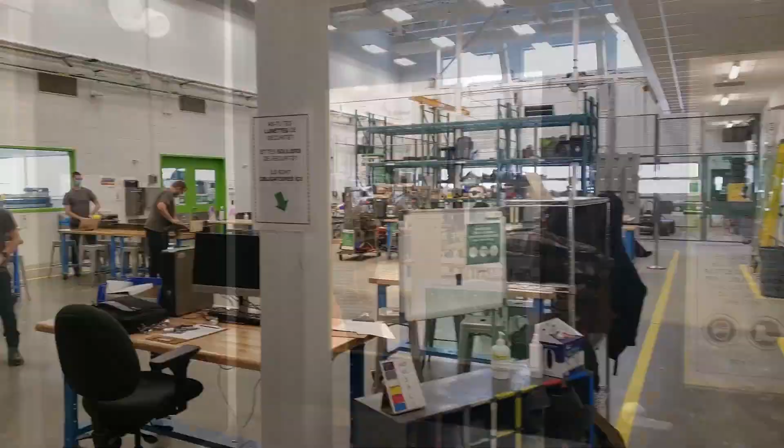So I recruited 7 engineering students from Sherbrooke University to build me a bot. Come on, let's go and see the team. Let's start with the team captain, Francis Roy. Francis is the project manager and works on the mechanical aspect of the propulsion system.

Next, we meet with Maxime Lavictoire. Maxime's responsibility is the development of the weapon's pneumatic components.

Here's François-Pierre Blondeau. He's the mad scientist behind the weapon. Is that a new weapon design? Yeah, but that's a secret.

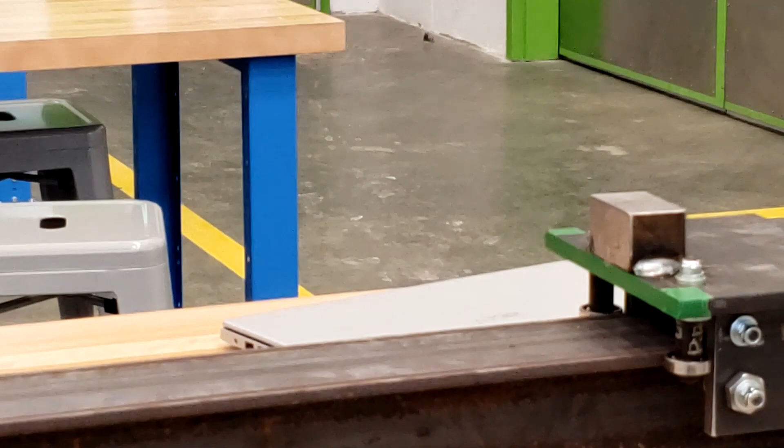Now we join Simon Boulet. Simon also works on the weapon's pneumatic components.

Next we meet up with Louis-Philippe Laliberté. He's in charge of machining and mechanical design.

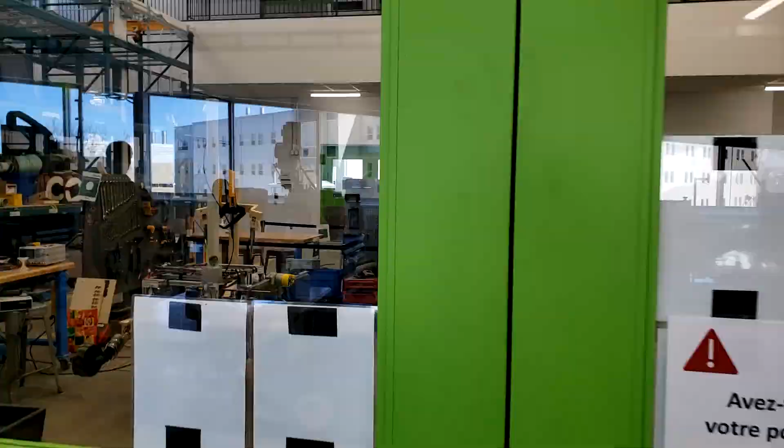Now we find Olivier Julien. Olivier is our electronics whiz kid and handles all the advanced system programming.

Last but not least, meet Félix Charpentier. Félix is responsible for sponsoring the Facebook page and CAD design.

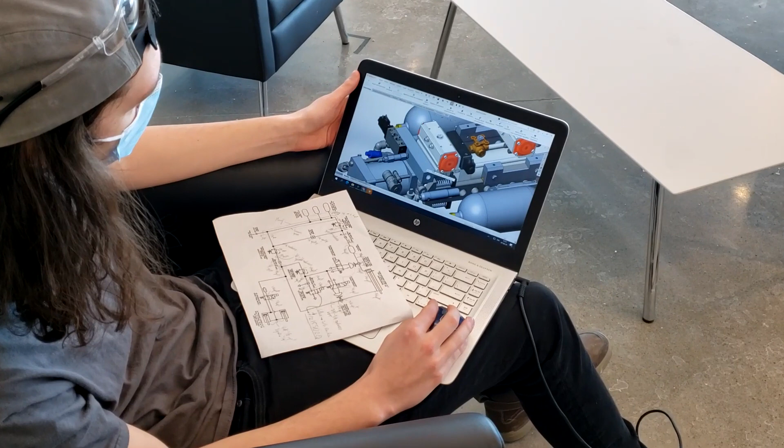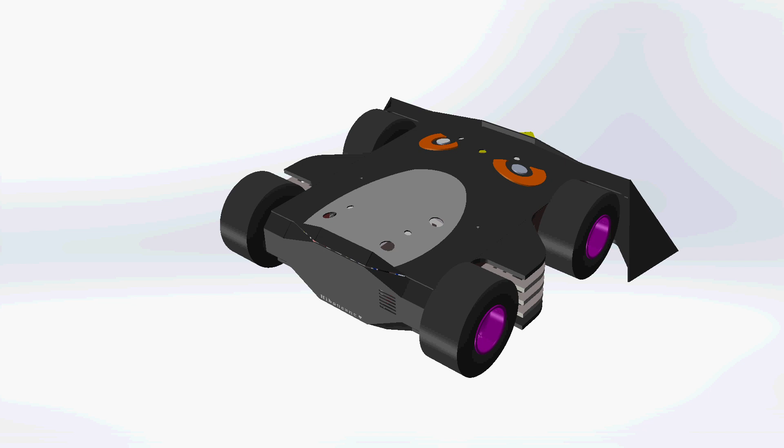Hi BattleBots, I'm Francis Roy, team captain and driver for Team XBot. Our goal is to bring to the show a robot who is fast, innovative, and fun to watch. Our team loves challenge and Nix represents this philosophy. We chose a design that goes off the beaten track but that can also survive a full match and put on a good show.

The fast and maneuverable side of Nix comes from my background as a motorsport driver. My driving style has always been described as aggressive but not out of control, so I want a robot that allows me to put my driving skill to good use.

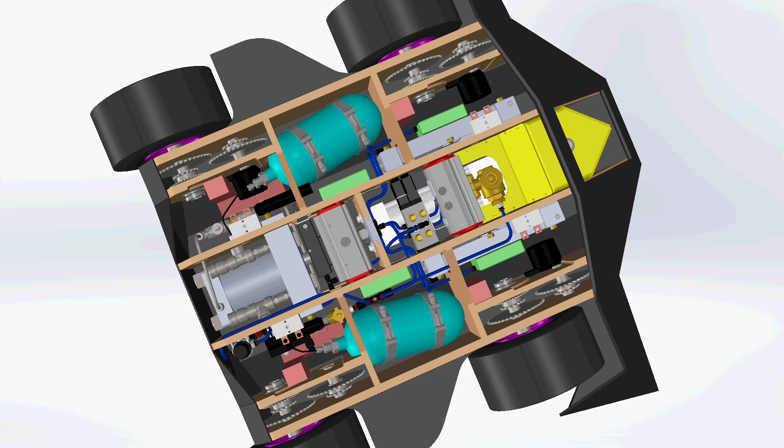Nix's main weapon will be a powerful puncher. The main advantage of this rarely used weapon is that, unlike a rotative weapon, we don't have to fight the gyroscopic effect of a spinning mass each time we turn. We also don't have to wait for the weapon to get up to speed. That means we're always ready to hit.

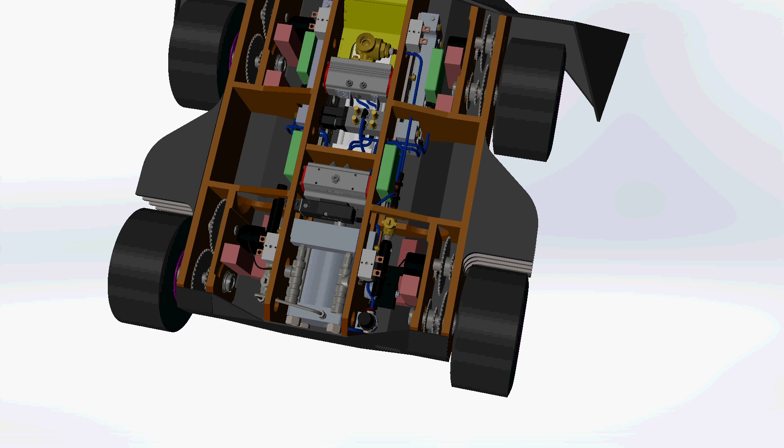We also want Nix to remain functional even if it takes a large amount of damage. Nix will be invertible so it will not get stuck if it gets flipped. It will also have 4 independent propulsion modules, so we can lose 2 modules on opposite sides of the bot and still be able to move. Also, the actuator of our primary weapon will be protected inside the robot behind a thick front armor. This allows us to keep a functional primary weapon throughout the fight.

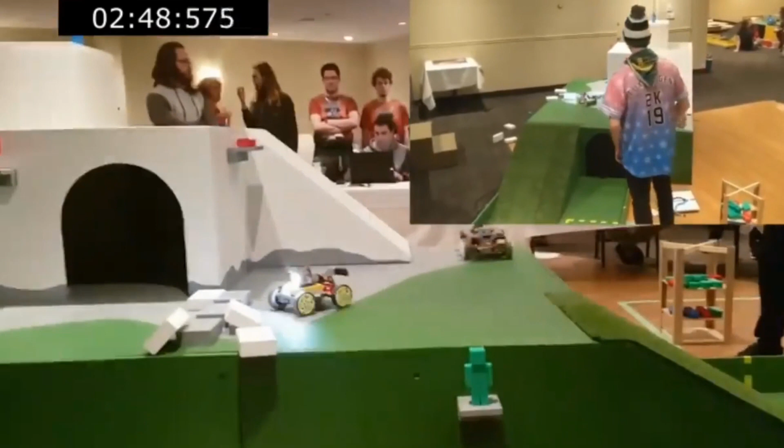Sherbrooke Racing Team out of Canada. Always a good team. We don't have a lot of experience in combat robots, but we do have experience in robotics and mechanical design. We've acquired our experience through several competitions, internships, and personal projects. We know that we must learn quickly in order to design a heavyweight combat robot that is strong enough to compete in Battlebots.

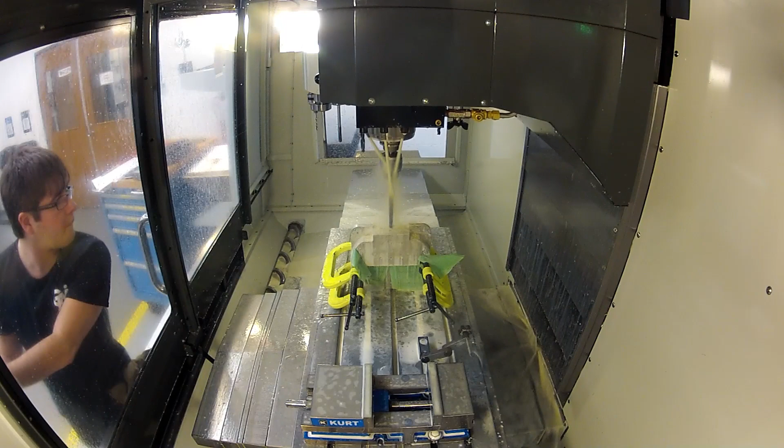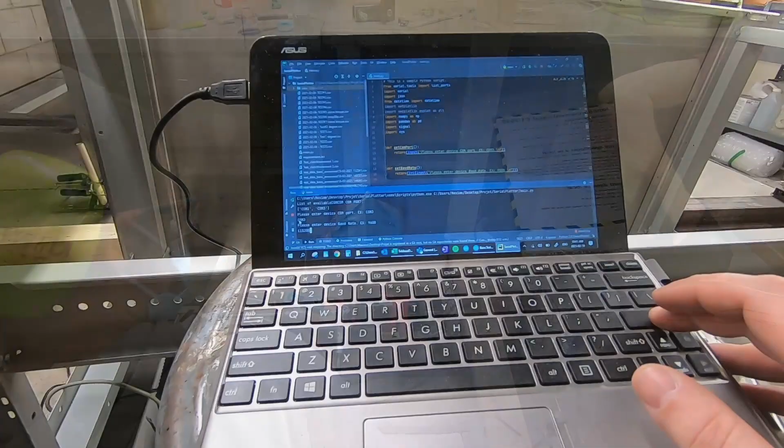For over a year now, we've been designing and testing components to ensure that they will be strong and powerful. The first module is weaponry. We've made a lot of calculations to choose the best combination of pneumatic parts. After selecting the parts, we assembled a safe test bench to validate our calculations. We now know that the chosen components can pack a punch without failing.

We also determined that if we preload the piston and use a mechanical trigger instead of the fast-acting valves currently used in most pneumatic combat robots, we can transfer up to 20% more energy to the opponent when we strike.

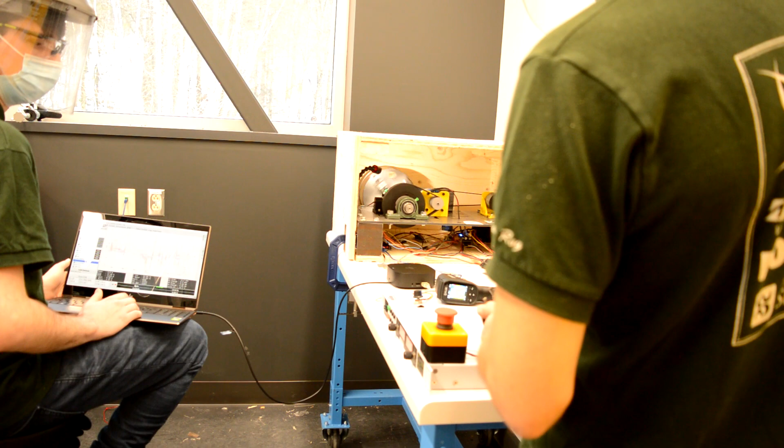We also selected light, strong, and powerful motors and drives to achieve our goal of speed and control. We then built a safe test bench to validate that the components meet the expected performance and that they can survive more than 3 minutes of extreme use without overheating.

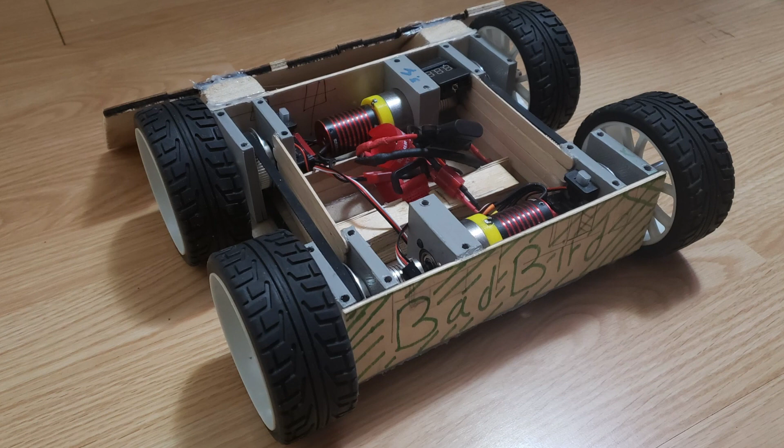We also built small and safe robots to develop the control algorithm and choose some components that will later be used in Nix, our heavyweight robot.

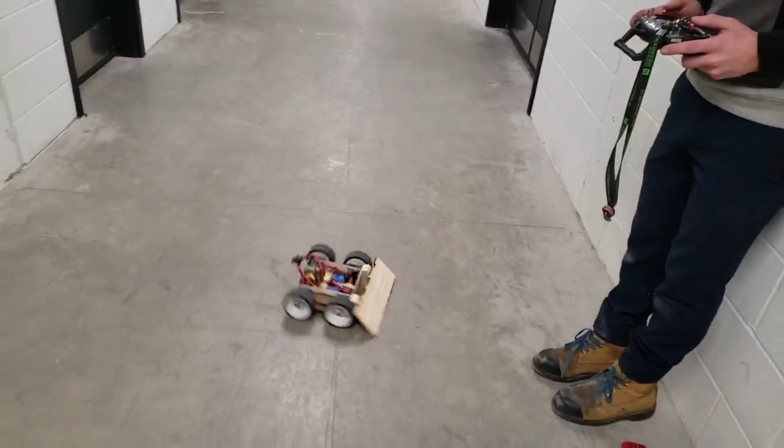Here we have Owlet. It runs a program that allows it to drive in a straight line under full acceleration. And here we have Badbird. It allows us to choose the best controller for a combat robot. It also helps the pilot practice safely while waiting for Nix to be built.

We think that Battlebots is the perfect opportunity to make us grow as future engineers. We already learned so much, but there's still a long road ahead. This is why we admire builders like Andrea and Michael Galatli and Will Bales. Their positive energy and willingness to share their knowledge is commendable.